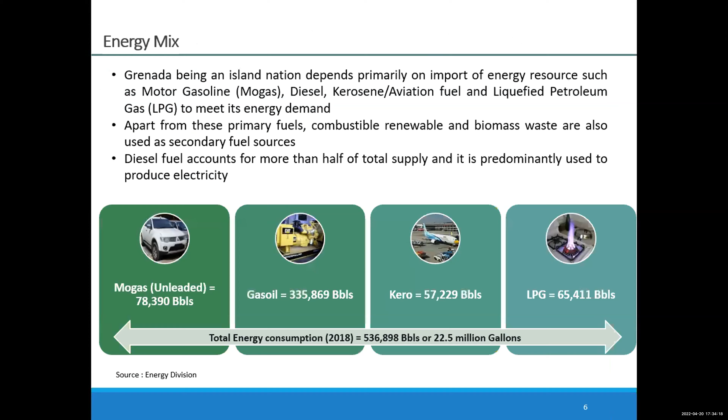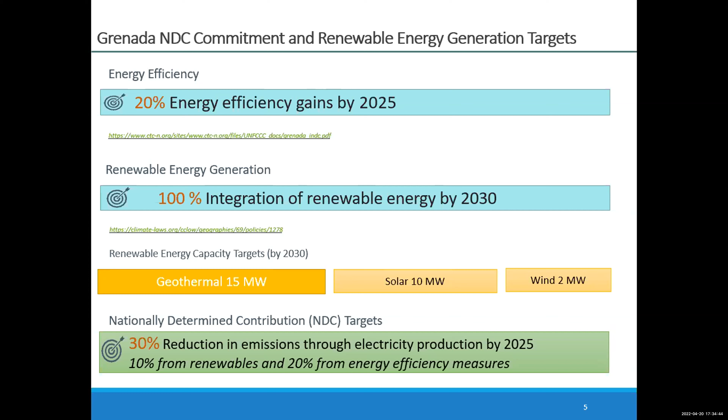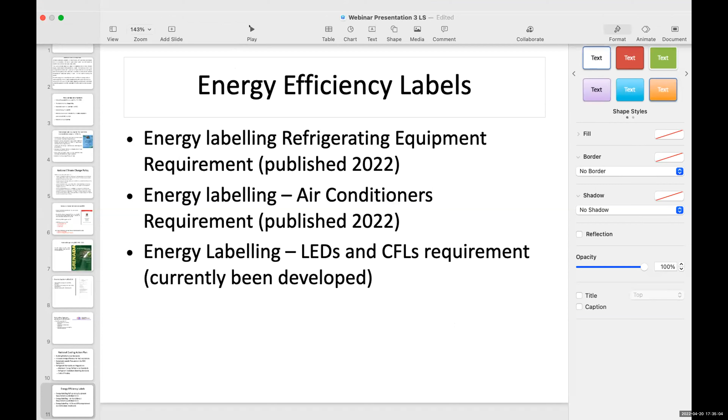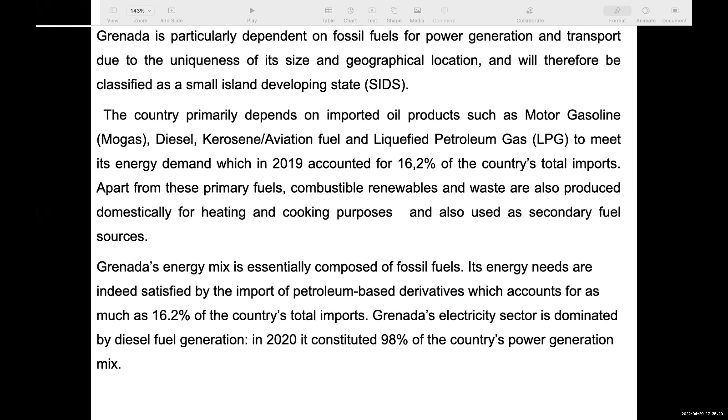Leslie? Good morning all, and thank you, Deacon. The presentation essentially is on the energy policies, the different policies and regulations that have been instituted to set the tone for the webinar. So if Dr. Rowe can stop sharing, I can share my screen so we can take it through. I take it everybody can see my screen now - yes, we can see. I would leave out all the preambular things here because I think Dr. Rowe would take care of that, but I want to speak on the protocol already established and recognize Dr. George, Mr. Joseph, Dr. Rowe and team, the other government officials, the officials from IRENA, the folks from the SIDS Lighthouse Initiative, the statutory organizations, the training institutions, and all the participants from Grenada, the region, and throughout the world.

With regards to some of the policies that government has instituted to promote the uptake of renewable energy and energy efficiency, quite a number of initiatives are currently being undertaken. First of all, perhaps the most overarching is the National Sustainable Development Plan 2020-2035, the National Climate Change Policy, the Nationally Determined Contributions, the National Energy Policy, the Electricity Supplies Act of 2016, the Public Utilities Regulatory Commission Act of 2016, and the National Cooling Action Plan. So what I would do now is go through some of them with brief annotations, starting with what the National Sustainable Development Plan speaks to.

This plan basically establishes feed-in tariffs and adjusts them accordingly to stimulate uptake and investment in renewable energy technologies. It also includes minimum energy performance standards for buildings, products, and appliances. There's a capacity development aspect that would improve the capacity of nationals with regards to renewable energy technologies and energy efficiency. As Dr. George mentioned, it speaks specifically to the introduction of electric and hybrid vehicles as we transition away from petroleum-based internal combustion engines that dominate the market. It also looks at other policies and support systems to make these technologies affordable for the energy impoverished, and includes public awareness for renewable energy and energy efficiency. All that is part of Outcome 8 of the National Sustainable Development Plan 2020 to 2035, and a lot of what we are going to be doing from the Energy Division would focus on Outcome 8.

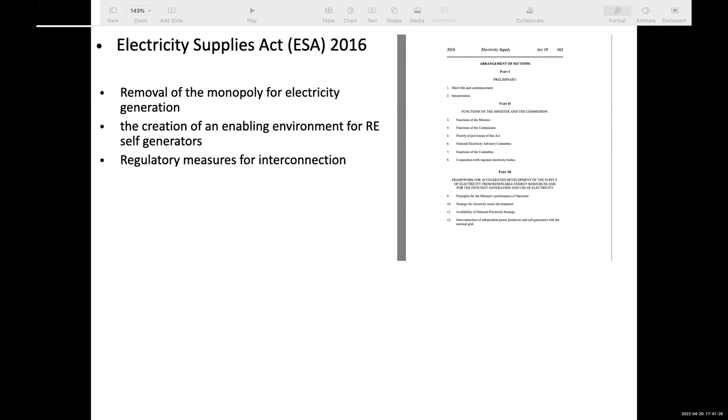The Electricity Supply Act was a major linchpin in the whole movement towards renewable energy. Essentially, the Electricity Supply Act removed the monopoly for electricity generation and created an enabling environment for renewable energy self-generators, both at the domestic level, the commercial level, and for independent power producers as well. It also takes into account regulatory measures for interconnection to the grid with the utility company. So that has been a major game changer with regards to renewable energy penetration.

And then we also have the Public Utilities Regulatory Commission Act of 2016. The PUC, which is the implementer of this act, is responsible for regulating utilities rates, and in this case electricity is the focus now for the PUC. As we've been told, later on they will address other utilities.

The PUC is also responsible for establishing the self-generator program, and that has been established. On the website, you can gain useful information as to how you can participate in the self-generator program, both as a domestic generator or a commercial generator. They are also responsible for defining the parameters for eligibility under the self-generator program. So I would invite you to visit the website, and you'll gain a lot more information in terms of how you can be part of the self-generator program.

And then we also have the National Cooling Action Plan. This plan basically addresses the cooling sector and energy efficiency in the cooling sector. From a survey that was conducted here, it was revealed that approximately 46% of the electricity generated by Grenada is used for cooling. So if we can achieve energy efficiency in the cooling sector, it means that we can significantly reduce our emissions related to cooling and draw closer to achieving the NDC targets described earlier.

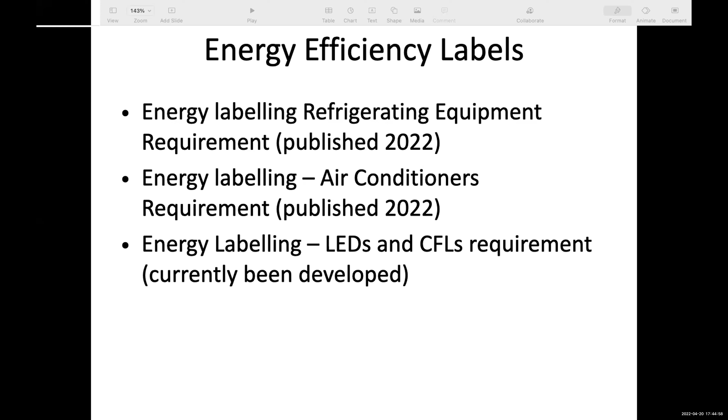We have a number of energy efficiency labels already established in conjunction with the Grenada Bureau of Standards. Already published are energy labeling standards for refrigerating equipment and for air conditioning equipment, both published in 2022. There are also energy labeling standards currently being worked on for LEDs and compact fluorescent bulbs.

One already established that was left off the slide is energy efficiency labeling standards for electrical appliances, such as blenders and fans. So there are quite a number of policies that seek to promote the uptake and proliferation of energy efficiency and renewable energy in Grenada. Government has also moved swiftly to provide incentives, concessions, and subsidies to promote the uptake of these technologies. With regards to electricity cost, government has instituted a zero rating on the VAT, as well as the removal of the environmental levy on electricity consumption for domestic consumers with usage up to 500 kilowatt hours, and a reduction of 20% on the non-fuel charge per kilowatt for all categories of consumers.

With regards to gasoline prices, there's a cap on the cost per gallon of gasoline and diesel whenever retail prices rise above $15. For example, with the recent change in gasoline price, had we used the original methodology for calculating prices, it would have exceeded $15, but the cap keeps it at $15. Another incentive in place is the subsidy provided for 20-pound LPG cylinders, capped at $40. Again, prices would have exceeded that, but subsidies have been provided.

Another very recent measure is that government has instituted a 100% concession of duties and taxes for all solar PV off-grid and grid-tied systems, including batteries and all other components such as wiring, racks, screws, bolts, and nuts—everything related to solar PV installation now attracts a 100% concession of duties and taxes. There's also a 100% concession on duties and taxes on electric vehicles, again to promote uptake. Already established several years ago is the exemption of VAT on all energy saving bulbs, including LEDs and compact fluorescents, under the VAT Amendment Act passed some years ago.

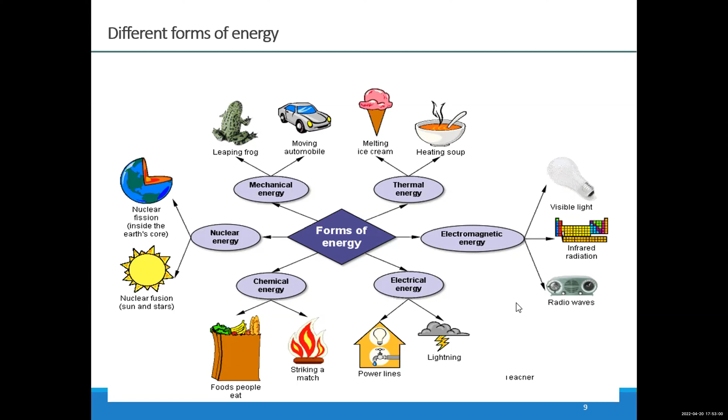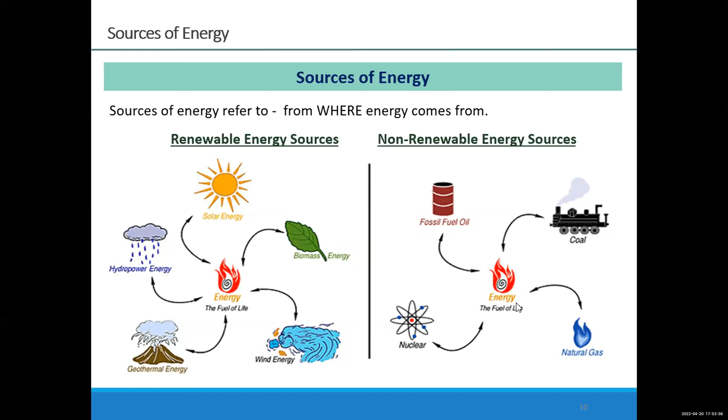So the energy, whatever the source of energy we have, we receive in two forms. One is renewable energy, and the other one is non-renewable energy source. Non-renewable energy source is a concentrated energy which is in fossil fuels, in coal or nuclear, or the fuels which are regularly available and we use. Even in Grenada, we use fuel oil for diesel, which is used for power generation. We have the other source, which is renewable, non-exhaustible renewable energy sources like solar, biomass, wind, geothermal, which is also a potential geothermal in Grenada, and hydropower energy from the rivers and other sources. So these are the different forms of energy, sources of energy where we can get.

But the main energy which we use for our regular use is electrical energy, which is a very focused one, which is mainly consumed in a normal, recent kind of lifestyle, what is expected, due to ease of conversion from the energy to any other form of energy. We get this electricity from both conventional and renewable energy sources. The energy which has been produced, electrical energy, will be converted in an easy way to other forms of energy for heating, lighting, and entertainment, or even for sound, whatever the form we want, it can be easily transferable from one form to another form. That is why electricity is a very superior and good, high quality energy, we can say.

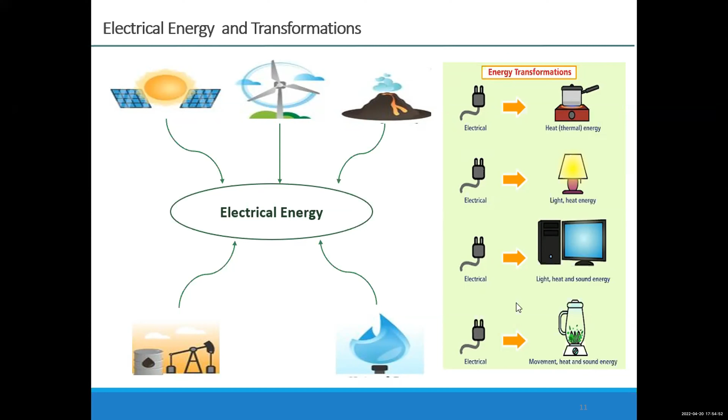So the electricity, when we are getting up to our user end, which will have different components, it also has inefficiency or wastage in the energy. It is a very easy analogy with beer, where if you want a full glass, there is some amount of foam which will be generated, which is nothing but waste. But it is necessary. So when electricity transfers from the generation point to the end user, a certain amount of loss will take place.

There is a reactive power which is there, which normally to minimize, you maintain what is called a good power factor, where active power and apparent power both should be close to unity. Then you will get a minimum amount of losses in the transmission systems or in the appliances. So electricity is not only the active power, but there is reactive and apparent power also, which are parameters one needs to know.

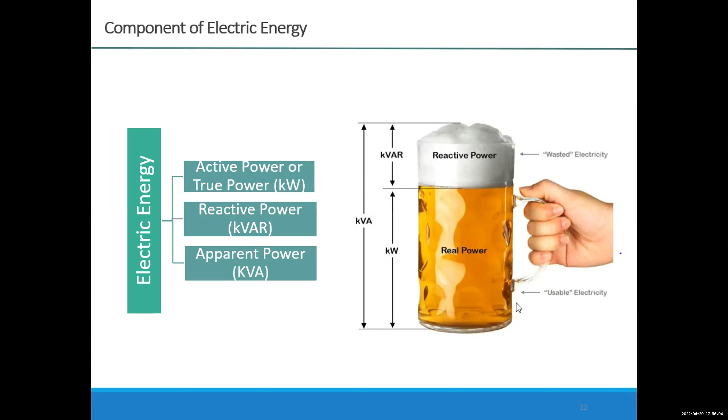So how do we decide how much energy an appliance will consume? The energy metering, which will be at the place in the domestic house or the institution or the facility or building, depends on the input power, which is the active power, being addressed for each individual appliance, individual equipment. That is in terms of kilowatt. 1000 watts is nothing but a kilowatt, which is the conversion rate normally we use.

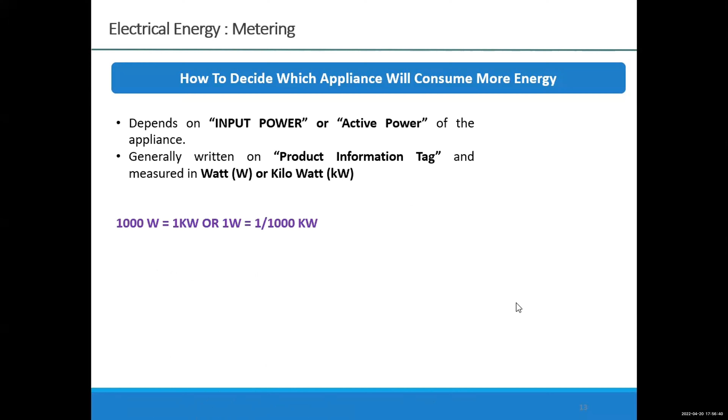So the energy meter installed at any premises will record kWh, that is per hour, every hour, how much units have been consumed, which will be recorded. So input power in kilowatts multiplied by time, that is the electrical energy. One unit of electrical energy is what the charges are paid for to the utility, like Grenlec, which has been paid.

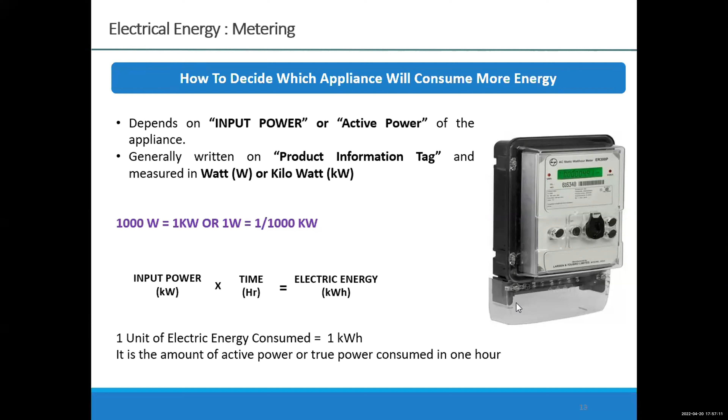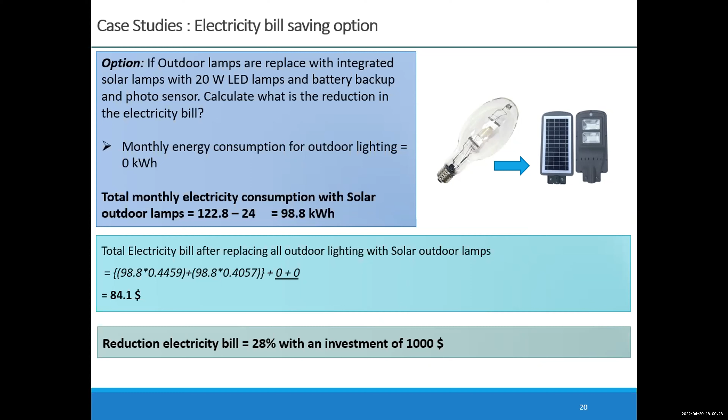Now we see the concept of energy efficiency and energy conservation. This is more for awareness of the basic concept. Energy conservation is nothing but a behavioral change, using our actions and activities to continuously ensure that less energy is consumed to do the same kind of work, whatever opportunities are there. Whereas energy efficiency is using less energy to do the same work through technology upgradation or proper utilization of appliances with respect to time of use, or other technological interventions. So this is the main difference between energy conservation and energy efficiency.

Some examples: turning off lights is energy conservation, not energy efficiency. Replacing conventional lamps with LEDs, which the government is promoting as a high efficiency program, is an energy efficiency appliance replacement program. Setting the thermostat of an air conditioner to a comfortable temperature of 24 degrees, instead of 18 or 20 degrees, is a behavioral change that reduces energy consumption - that is energy conservation. And replacing old non-inverter ACs with high efficiency inverter-based air conditioners is energy efficiency. So these are some examples.

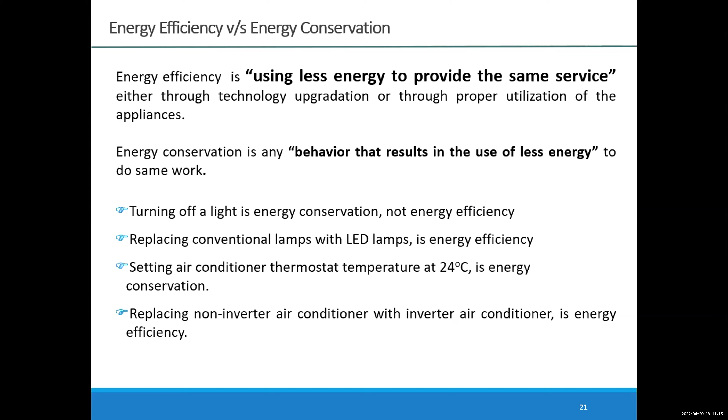Now, other examples like washing machines - front loading versus top loading is a technological change. People should know that front loading washing machines save more energy because they use less water, and therefore less energy to heat that water. Whereas drying clothes outdoors in the sun is an energy conservation opportunity, which is more of a behavioral change.

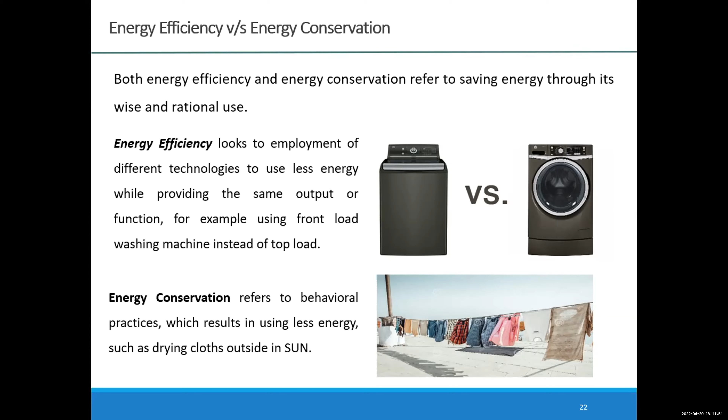For energy efficiency and conservation, other opportunities include use of high efficiency LED lamps, for which standards now exist in Grenada, and high efficiency ceiling fans using BLDC DC motors - direct current based appliances where energy savings are very high. Inverter-based air conditioners are also a type of DC integration, and induction stoves, which use a different cooking mode and different vessels instead of conventional electric stoves. In terms of consumption, all these technologies provide savings of over 30 to 40% compared to conventional appliances.

Whereas behavioral changes include examples like using staircases, bicycles, sizing of burners for cooking, and even transportation choices - these are items for energy conservation. Even using solar batteries and solar charging facilities for mobile charging is a behavioral change, where people adopt renewable energy, so this is also considered energy conservation.

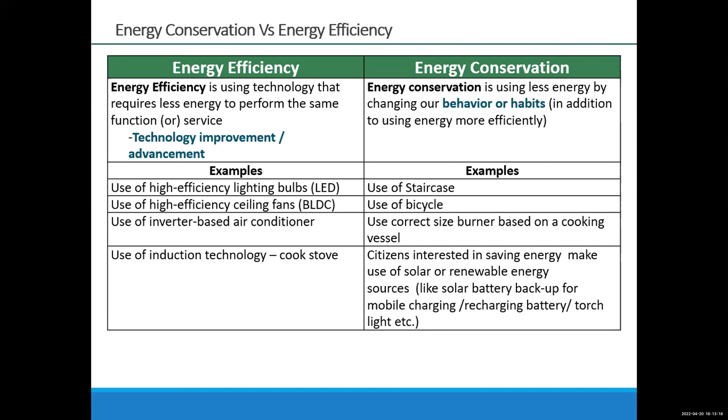Energy is particularly important for economic growth, as everyone has been told, even during the opening remarks. Energy efficiency is about increasing the efficiency of an appliance through technological change, with continuous development of products taking place. Energy conservation also includes energy efficiency, but includes simple actions like turning off a switch, as we saw in the example. Energy management involves various steps - you need to define, in an institution, the awareness, knowledge and intention of people, and provide them facility and training. If you do all these things together to bring down energy consumption, it is called energy management practices.

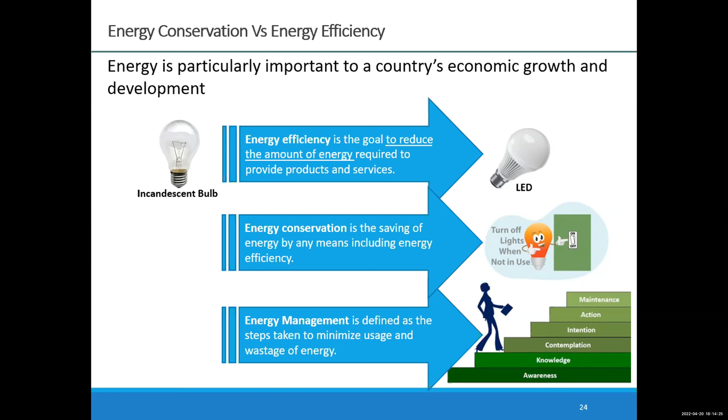The difference between energy intensive, energy efficiency, and energy conservation. If someone is taking the stairs, that's nothing but energy conservation, which we are already discussing about habits and practices.

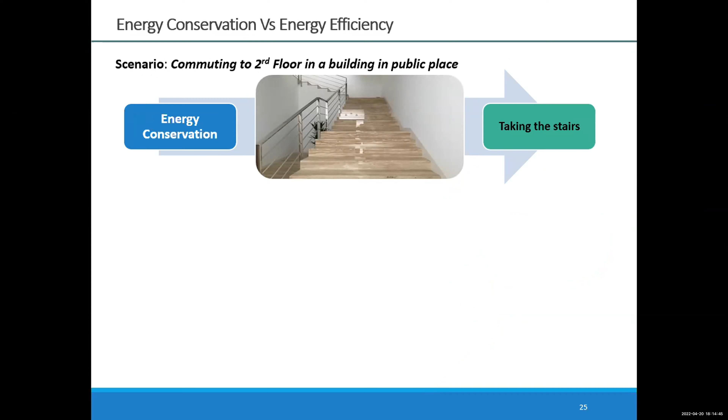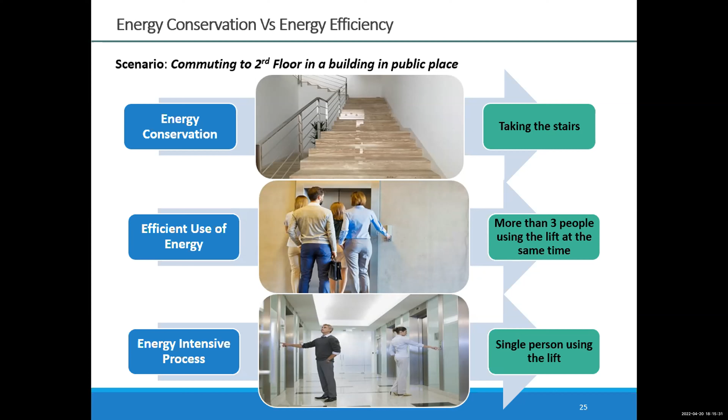Efficient use of energy: if you have a lift with a capacity of minimum 3 or 4 members, and you use it at full capacity, you're using the minimum amount of energy required, which is an efficient way of using it. But if a single person uses the lift, that's adopting an energy intensive process. In your daily activities, you can find different aspects of whether you've adopted an energy intensive process, an energy efficient process, or energy conservation through certain activities in your own way.

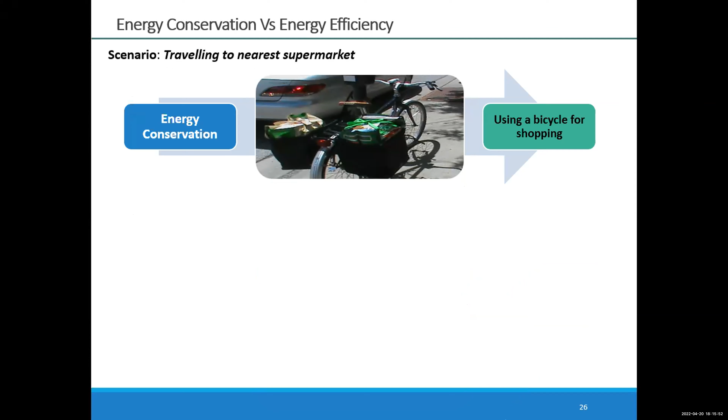Even transport, the energy consumption for the transport sector is very high, even in Grenada. If you adopt walking or using a bicycle, that may be the energy conservation mode if the destination is near. Using an efficient way means a small car or hatchback, not like a pickup where the mileage per gallon of fuel is less. So the adaptation is how you adopt your strategy and what kind of vehicles you buy.

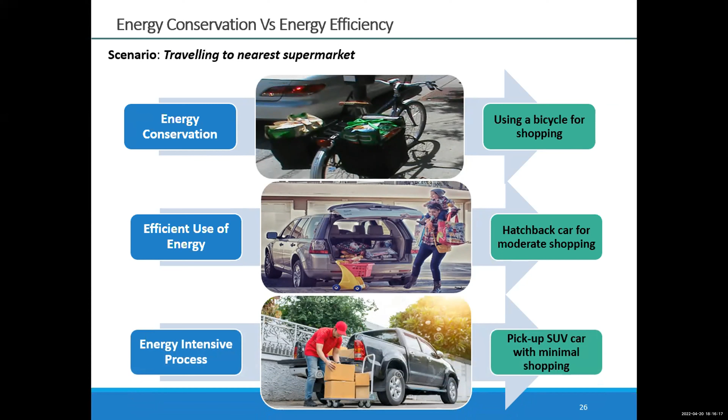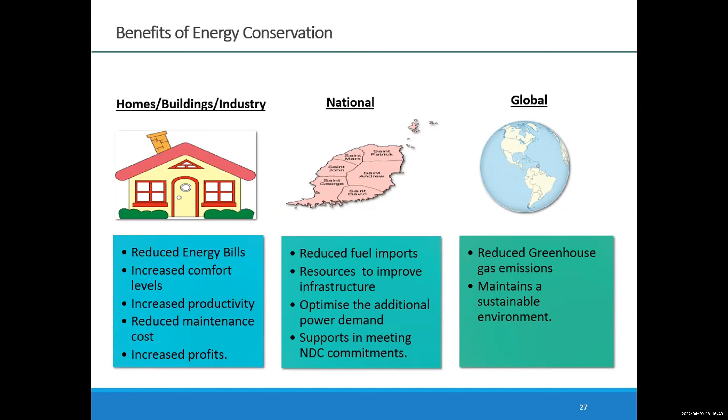Even now, the government is promoting electric vehicles with removal of taxation. You have different benefits from adaptation of energy conservation at the national level, individual level, and even global level, which is why the NDCs, the nationally determined contributions, have energy efficiency playing a key role.

If you see the energy cost, availability, and scarcity - in recent weeks, with the war between Russia and Ukraine, there is a global issue where various countries are facing fuel shortages. That's an issue if you're depending more on fossil fuels. The cost is also fluctuating continuously, reaching even $120 US dollars per barrel, and there's an environmental impact as well.

But economic growth is a continuous process for every country, so growth will be there. So one way of meeting the energy demand is energy efficiency - it's a must. It's a continuous process, not something done in 1, 2, or 3 years by 2025. People have to continuously adopt energy efficiency methods and practices. As on date, in Grenada, at least 5 megawatts of electrical power can be brought down through energy efficiency measures alone.

Dr. Rao, I was thinking as you presented the example with the elevator, to take it more to everyday use - for example, you can say you use less energy if you iron all your clothes at once instead of ironing individual clothes. Or perhaps if you're using a washing machine, you wash a big bulk of clothes instead of using it for small loads. I just wanted to relate that back to your example with the elevator.

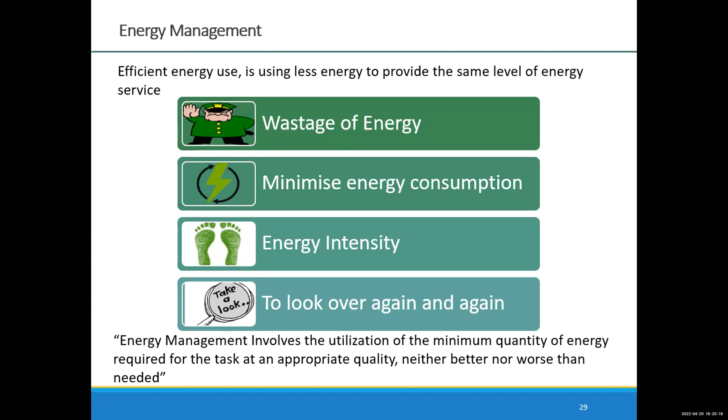The basic startup is, whatever activities are going on, try to first identify energy conservation measures where there's no investment needed, like switching off bulbs. Even last session we saw government buildings where lights are on 24 hours because there's only a single switch for the first floor, second floor and ground floor. So you need to identify ways to cut down energy with practices, whether you can integrate new switches so that employees, when leaving the office, can switch off the appliances.

We have seen many places where water coolers in offices during weekends, when people are not there, can be switched off from the plug itself so that power can be saved. So each facility needs to identify their own consumption, where it is happening and how. That is the first step.

Then you can go for the next step, energy efficiency, where new items can be integrated, new retrofits can be done, like motion sensors or automation or timers. Those kinds of energy efficiency retrofits can be integrated as a second step.

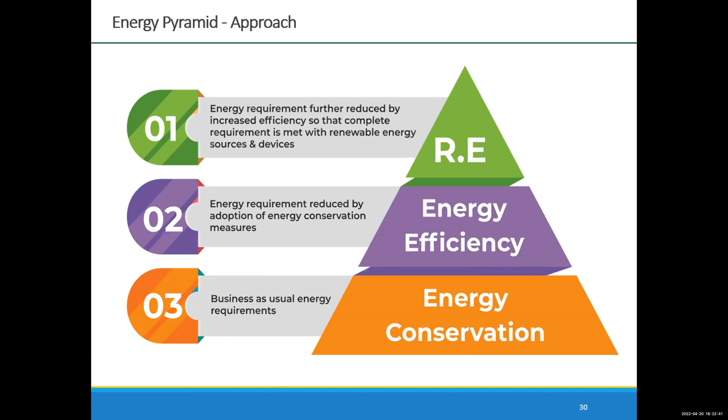By doing energy efficiency and energy conservation, one needs to bring down the energy consumption in kWh of the facility or appliance. Then we can look forward to the remaining energy, where renewable energy can be integrated. Only then will cost optimization happen. Without doing energy conservation or efficiency first, if you try to go directly for renewable energy, the cost economics will not work out, and it's not a sustainable approach. One can understand this from the energy pyramid.

So why has energy efficiency not been taking place? It's basically about who manages the energy in a particular facility. If it's only the responsibility of the electrical department or whoever looks after electricity, they don't know what the end user requirements are and how they operate.

So there are stakeholders - all people should have a participatory role. It's not only the people managing the electricity, but also the people using these appliances and equipment; they should also provide inputs. Then you have to draw up standard operating procedures, SOPs, for each appliance - how it should be operated. Then it should be informed to all employees and staff, and they start working accordingly.

But sometimes energy inefficiency is built into the system because vendors promote whatever appliances are available for them to sell. One needs to look at minimum performance standards, minimum energy efficiency performance, like for air conditioners and refrigerators in the market. Those standards should be checked before procurement, rather than leaving it to the vendor's market.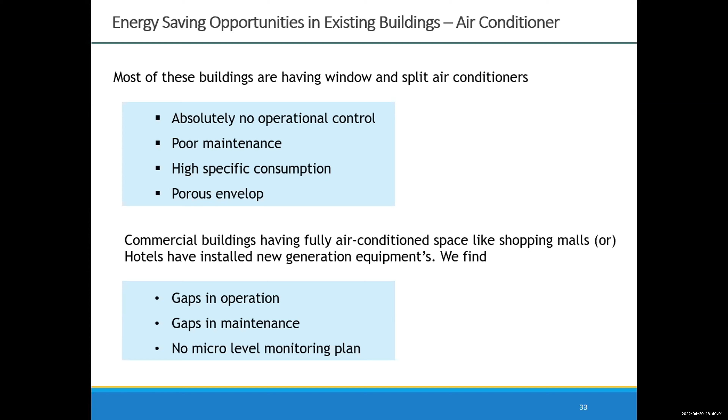Where if you have the outdoor unit without a shade, the outdoor unit itself will become very hot during the summer, the sunny temperature. And if that itself has become hot, then it will affect the cooling - it will pass on to the refrigerant. So that is the issue.

So there should not be open-ended outdoor units - it should be kept under a shade. Then there should not be any restriction - there should be free airflow to the outdoor unit. That is also an important aspect.

One needs to look at whether they are fixing units on the walls or rooftops - wherever they are fixing the outdoor unit, not only from the sun heating, but also if the weather has continuous rainfall and other things passing on the outdoor unit, there also the life of the unit will come down, rusting and other things will take place in the units.

People must have observed this. So it is good that if somebody is buying air conditioning units, they need to take care of the outdoor unit, because that is the only part that's outside - the indoor unit is kept inside. But by doing the shading and other things, 5 to 8% energy can be saved in some places. One needs to look into this particular angle.

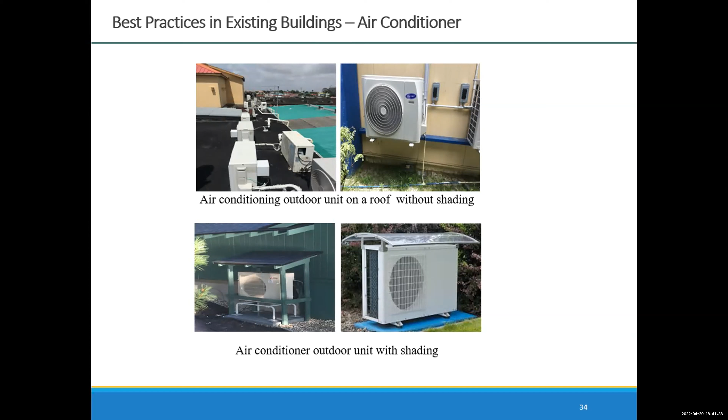One has to map any building or any facility to identify where the high energy intensity and low energy intensity areas are. Next.

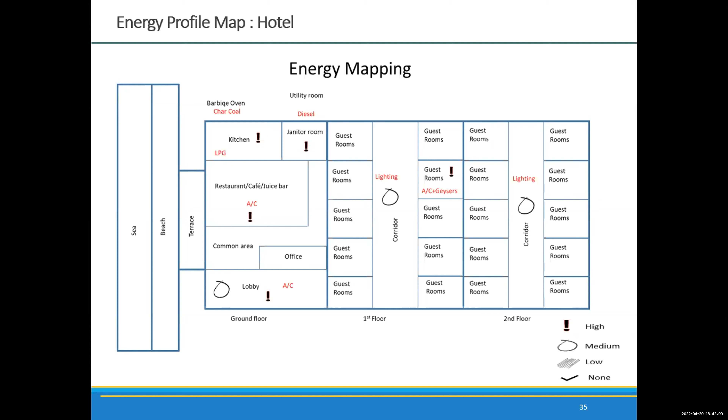Once after mapping the energy consumption, you have to identify what could be the probable reasons, and how you can monitor what kind of loss or wastage is taking place - like guest rooms and common areas with high energy consumption in ACs, kitchen where LPG and charcoal are the high energy consumption, utility room where diesel is the consumption, and guest rooms which apart from air conditioning also have water heaters and geysers.

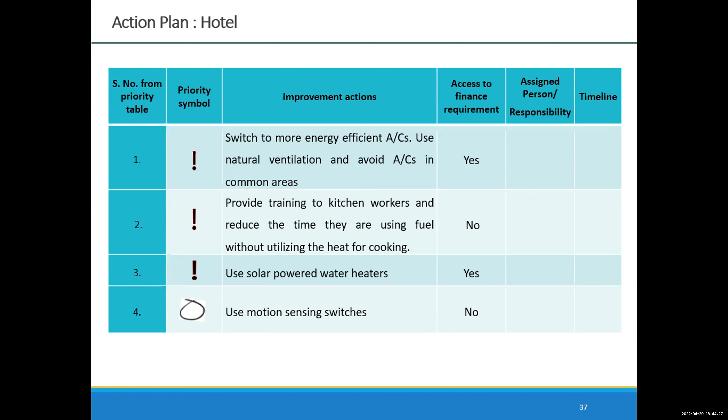After air conditioning, the next predominant energy consumption in public buildings, residential or outdoor areas is lighting. One needs to look from the design stage itself, whether for new buildings or retrofitting existing ones: efficient lighting systems, more daylight integration at all levels, so that at most you don't need lights on. There are a lot of techniques and retrofits available now that can be looked at.

Efficient lamps, LEDs mainly nowadays, are available in the market at a good price. Using luminaires to increase brightness is another area. Efficient controls need to be integrated too, occupancy sensors, daylight sensors, even timers for weekends and other situations to control. These opportunities also exist in lighting.

For task lighting, if there's a big room where only one or two people are using it but the entire floor is operated through one or two lighting switches, task lighting can be integrated. These are the means and ways one can look at in lighting. So air conditioning and lighting are the two prominent areas in public buildings and training institutions.

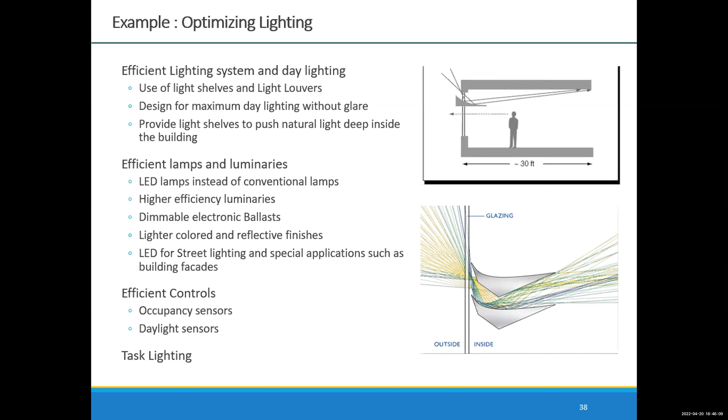Ultimately you can consider solar air conditioning for smaller capacities; for bigger capacities it's very difficult and solar becomes very expensive. So solar air conditioning should be looked at as the last option. That is how one needs to drive energy efficiency towards renewable energy.

I think one other important consideration is that even before we get to the base of the pyramid, before efficiency and conservation, is to first look at avoidance of having to use AC. That should be the first step, in the sense that you can design your buildings or rooms so that you can use natural ventilation and avoid having to use energy for cooling.

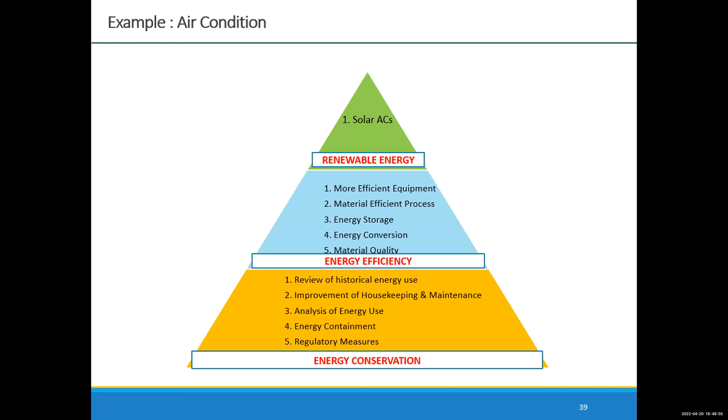Next slide. So for energy use, whenever we are using energy, one has to look into the aspect of where it is needed, when it is needed, how much is needed, and what quality of energy we are using for that particular application or use.

One has to put these questions to themselves before use, or list down your activities and try to mark how things are being done. Because once you put this question to yourself, you will come to the answer that some scope exists. That kind of confidence will be built by this exercise itself. Next.

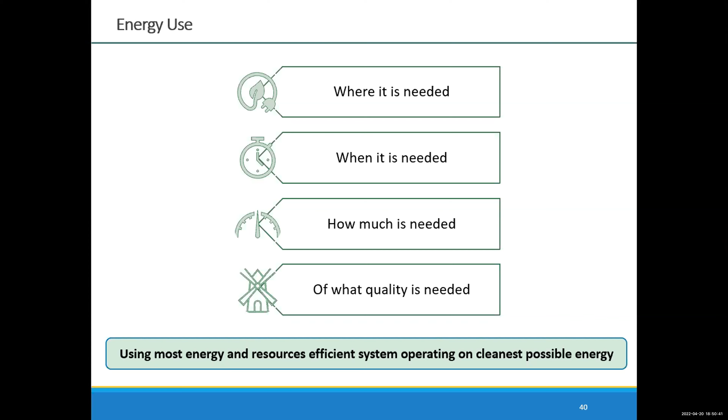The 5 T's for energy conservation is very important. One can look into any of their actions or appliances being used. You can look into the option of turning it off where possible, like UPS systems, or switching off from the main instead of remote switching, like a TV, you can plug it off from the main switches. You need to see where there is scope for turning off items. That is an important one.

Turning it down is about temperatures. When using heating appliances like microwaves and other things, one needs to look at the best, lowest temperature for the heating elements. And turning it up, like thermostats for air conditioning, the best higher temperature. The normal temperature set by manufacturers is around 18 degrees, but normally we apply 21, 22. If we can manage with comfort clothing and other adjustments to set it at 24, that is a reduction in energy consumption.

Turn around means you need to look into the appliances, what best is available within your own set of uses for the same purposes. And turn it out means old and inefficient equipment, mainly motors and other things that have burned out 2 or 3 times and you still want to use them, causing high energy consumption. You can look into the best way and when it should be turned out, phase off that particular appliance or equipment and go for a new one. This is the 5T concept for energy conservation, which is very important. Next.

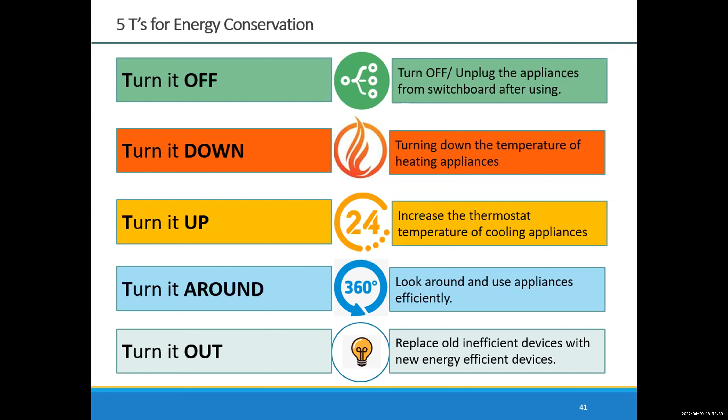As we are seeing, there are high efficiency products available in markets, and minimum performance has been set by government policy, and standards are being brought into place for air conditioners, refrigerators, and LEDs. CARICOM itself is developing standards, and Grenada has already adopted high efficiency equipment standards. So for procurement, mainly as we are discussing public procurement as a startup, one can look for the minimum performance, and even air conditioners with high efficiency have already been demonstrated and are being sold in the local market.

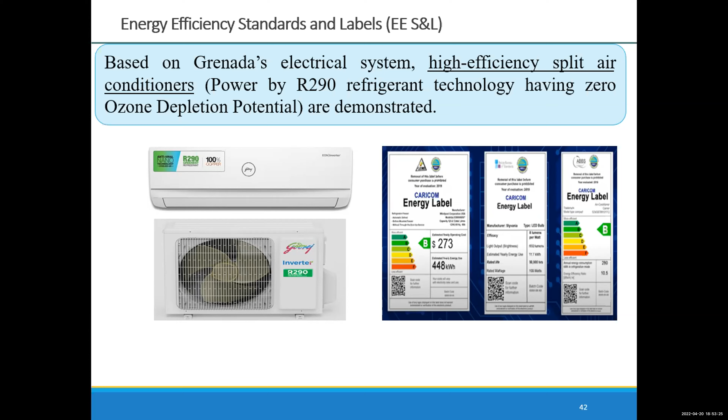EV is definitely going to pick up in the next 2 to 3 years across the Caribbean or entire global scale. Even in India, we see every day a new EV company starting up, coming up with 2-wheelers, 4-wheelers, and even transport vehicles.

In the Caribbean market, we found the import cost of a good, comfortable vehicle is around $40,000 US. If you work out the payback period comparing gasoline and EV with grid power cost, there is a good amount of cost savings in running cost. Depending on the type of use and number of kilometers, the payback period works out to almost 4 years at today's cost. Public or government institutions with 4 or 5 vehicles can have their own charging station and start using electrical vehicles.

Some model can be defined. Since it's an island where there is a certain distance only, the kilometers of use of vehicles can be monitored for a certain period, and definitely EVs can be integrated into public and government institutions. That is a strong point, I feel.

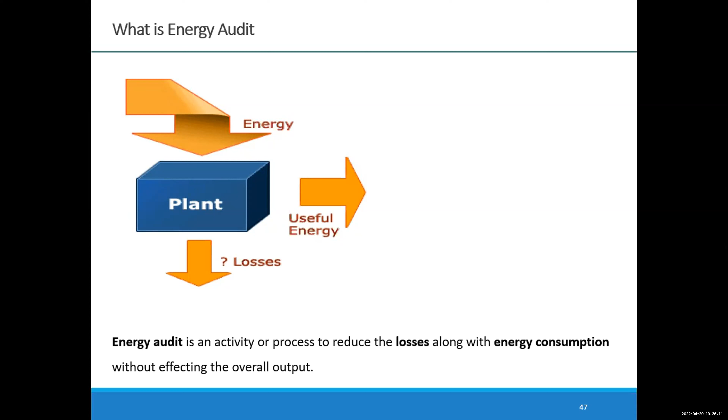That is energy audit. So energy audit is defined as the verification, monitoring, and analysis of energy use. It also includes submission of a technical report which includes all the recommendations to reduce energy consumption, the cost benefit analysis, the payback period, and the financial benefit of implementing any energy saving measures.

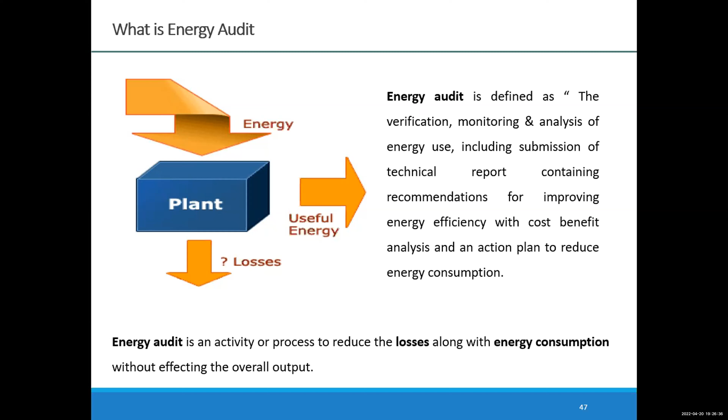Now why do we need energy audit? If we talk about any industry or facility, the 3 top operating expenses are energy, labor, and material. Labor and material we can't compromise on, and energy also we can't compromise on, but we can reduce energy consumption by changing our behavior or changing the technology. So the only way to reduce the energy cost or overall operating cost of any facility is by reducing energy consumption without affecting the final output.

This can be done by doing in-depth analysis of the energy consumption pattern and finding the potential for energy saving that exists within the facility. For example, one participant from a college or university mentioned that during lunchtime, colleagues leave their room and go for lunch, and lights and ACs remain switched on. That is a loss. So we need to identify the different areas where loss is happening and how to reduce that particular loss, and for that we require energy audit.

Hence, energy audit helps to understand how energy, whether electrical or thermal, is used, and to identify where waste occurs and where there is scope for improvement. It also gives positive orientation to energy cost reduction. Ultimately, the aim of energy audit is to reduce energy cost and translate the proposed energy saving measures into reality. It should not be that we propose something which is not practical or not implementable.

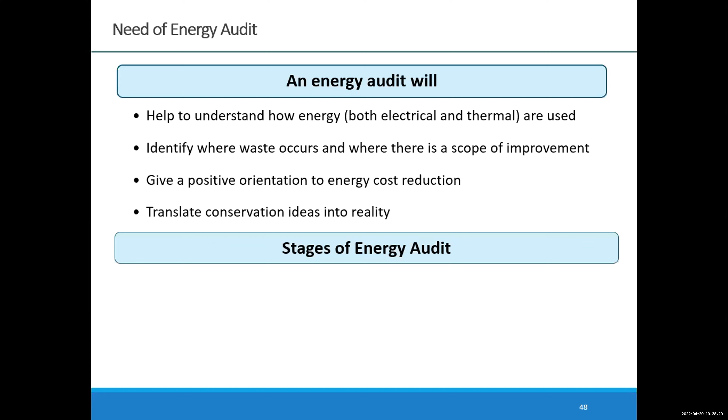What are the different stages of energy audit? The first stage is to gather preliminary data, for example the historical electricity bill. Why is the electricity bill required? Because we need to know how much electricity is consumed every month within the facility, home, or institute. Then based on that, we conduct a field visit, or plan a field visit, to find the scope or different areas where energy can be saved, and the different energy conservation measures that can be implemented, which are practicable.

And finally, we analyze and summarize all the energy conservation measures, discuss with the management, and find out which ones can be applied within that facility and which cannot be implemented. Finally, we do the follow-ups, to see how much actual energy saving can be achieved by implementing any energy saving measures.

All these things are also done to train the staff, so that once the audit phase is completed, the staff can themselves take the initiative and do the audit of their facilities, or audit after 1 year or 2 years, or whenever required. So each of these steps we will see in detail in a later part of the slides.

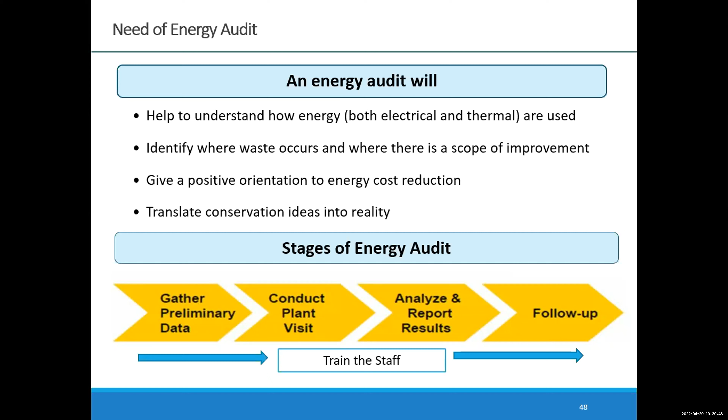Now the question arises, what are the different types of energy audit? The type of energy audit depends on the function, size, and type of the industries. For example, a small hotel or small institute might not require a detailed or in-depth audit; only a walkthrough audit is sufficient. So based on the potential and magnitude of the energy saving and cost reduction desired by the management, energy audit can be characterized into 3 parts.

Level 1 is walkthrough energy audit. Level 2 is detailed energy audit, and level 3 is investment grade audit.

Walkthrough audit is a simple energy audit, a one day or half day visit to the plant, which provides a quick overview of energy use patterns based on observation and historical data collected. Before going for the field visit, the energy auditor will collect the historical energy consumption trend, like the last 1 or 2 years of electricity bills, to see how the energy consumption pattern increases or decreases. For example, one of my friends said that after installing solar panels, the number of ACs increased from 4 to 20, and this is reflected in the electricity bill. All these things come to know by seeing the monthly electricity consumption, the kWh units consumed within that facility.

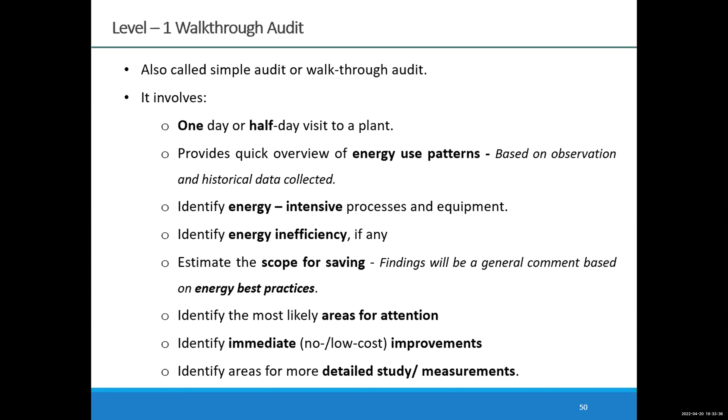In a walkthrough audit, the auditor also identifies areas that require more detailed study and suggests to the management that a detailed energy audit be conducted. For example, in hotels or resorts, lighting load or air conditioning load is usually the major consumer, so if management wants a detailed energy audit, these areas can be more focused upon. This brings us to level 2, the detailed energy audit.

In a detailed energy audit, the auditor evaluates all the systems and equipment that consume energy, and the audit comprises a detailed study of energy saving costs.

The detailed energy audit can be carried out in 3 phases: the first is the pre-audit phase, the second is the audit phase, and the third is the post-audit phase. As I mentioned, in a walkthrough audit, energy saving measures are generally based on best practices and mostly fall under no-cost or low-cost categories. But the detailed energy audit offers the most accurate estimate of energy savings and costs, and also tells the financial benefit you will get after implementing those particular energy saving measures.

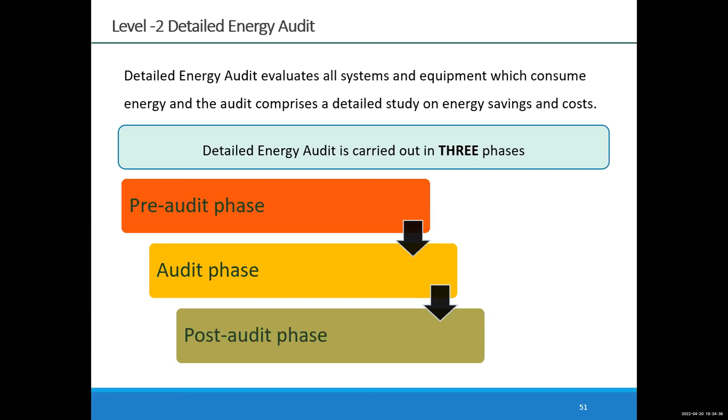In the pre-audit phase, the auditor will discuss with the site manager about the energy audit. They will try to understand the exact requirement from the management, what they want from the audit, any particular area they want to focus on, or if they want a full detailed audit. Then they will discuss with the facility management team and explain the different steps that will be taken during the audit phase.

Then they will collect the historical data. They will ask for like 1 to 2 years of electricity consumption bills. They will ask if any other source of energy is being used, for example diesel consumption, and how much diesel consumption there was in the last year within the facility. Based on that data collected, they will analyze and see what is the baseline for that particular facility, and how much average electricity consumption there is every month.

Along with that, they will also ask about the instrument list - what kind of instruments are installed within the facility. For example, for a hotel or resort, how many air conditioning units are installed, what is the rated power or wattage of those units, what kind of lights are used. For an institutional area with labs, how many computer systems and what different kinds of equipment are there. Then they will decide what kind of instruments need to be carried, and the exact or suitable time to do the field visit.

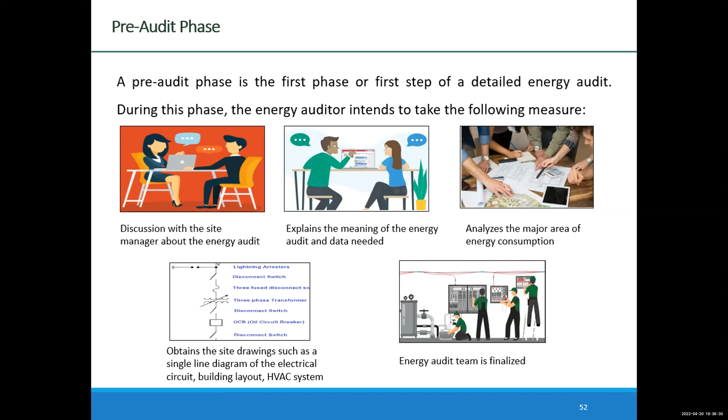The next phase is the audit phase. The auditor or team of auditors will go to the facility and do the evaluation of each and every equipment or area. They will try to find the efficiency of the equipment installed within that facility.

They will find which areas have more losses. For example, if you go for any water utility system, pumps will be there - water delivery pumps. So the energy auditor will go and evaluate the efficiency of the pumps. And for example, in a resort, AHUs - air handling units - will be there. What is the efficiency of that air handling unit? What is the efficiency of the compressor unit? All these things the energy auditor will do during the audit phase, during the site visit.

So during the audit phase, during the site visit, the energy auditor will calculate the efficiency of the equipment. They will prepare the process flow diagram and do energy balance. For example, suppose X unit of energy is consumed within the facility - out of that X unit, which area consumed the maximum energy? They will try to find out the different areas and their energy guzzlers within the facility.

Then they will identify the energy conservation opportunities that exist within the facility. Once identified, they will determine how much actual cost saving will be there by implementing those energy conservation opportunities, and what the payback is - whether the payback is immediate, less than 1 year, or requires more investment with payback within the next 3 to 4 years, or more than that.

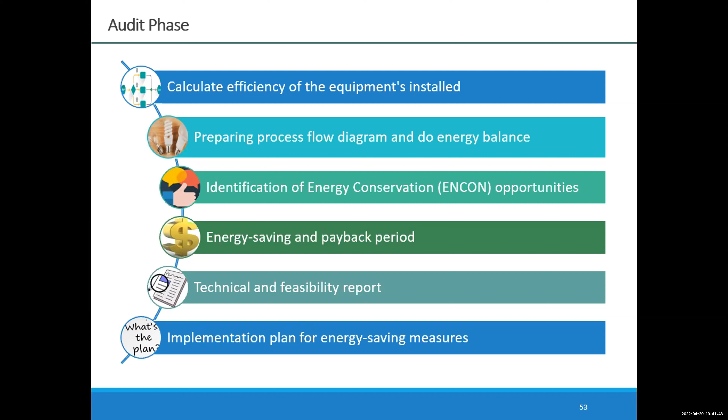Next slide. So the post-audit phase mainly focuses on implementation of the energy conservation measures and monitoring how much actual saving is achieved. For example, if the efficiency of a pump is very low, and we replace it with a high efficiency pump, then how much actual energy saving is achieved. All this comes under the post-audit phase, which includes implementation and monitoring.

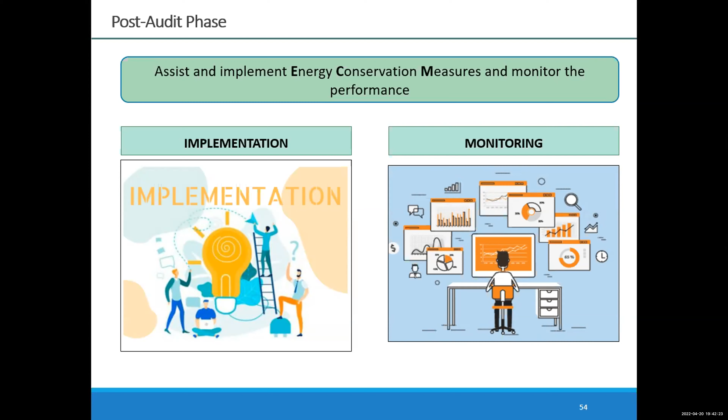Then the third one is investment grade audit. All energy saving conservation measures are generally categorized into 3 parts. First is low cost or no cost measures. Second is where the payback comes within less than 1 year. Third is where a huge upfront investment is required, for example installing solar panels, which requires a huge upfront cost. For all areas where huge upfront cost is required, management will ask to go for investment grade audit.

It includes all the steps of level 1, the walkthrough audit, and level 2, the detailed energy audit. But along with that, it also provides in-depth financial analysis such as net present value and IRR. For example, with solar panels, what is the IRR after 20 years, or what is the NPV after 20 years? So investment grade audit provides a guaranteed saving verification plan, because management needs to put in a huge upfront cost, so they will ask for detailed financial analysis. Only in that case will the auditor go and do an investment grade audit.

Now, what are the different energy audit instruments required? There's a famous saying: if you can't measure, you can't save. So to save energy, it's first required to measure how much energy we are consuming and how much losses are happening. To measure this, we require different instruments, because generally most facilities don't have installed instruments to measure the parameters. So an auditor will carry their own set of instruments.

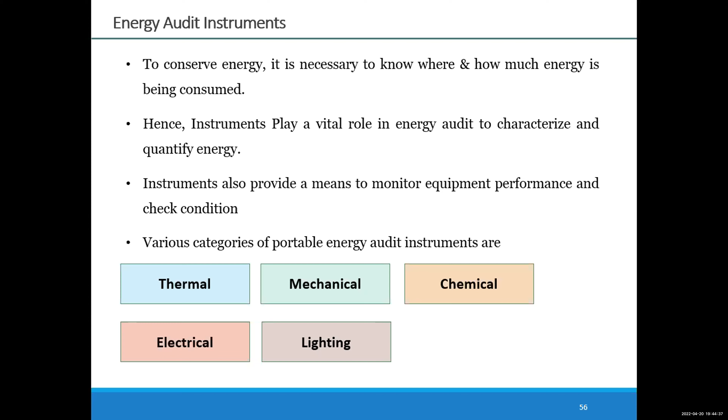Generally, the instruments are categorized into 5 categories: thermal, mechanical, chemical, electrical, and lighting. Electrical instruments are used to measure different electrical parameters, like an energy meter, which tells how much energy is being consumed by a fan or any particular appliance.

In the same way, we will also carry our own set of electrical instruments. It will tell what is the voltage coming into the facility, what is the current, whether there are any harmonic distortions, how much power is being consumed, what is the power factor and frequency, and if there is any unbalance. So to measure all the electrical parameters, we carry our own set of instruments, like a load analyzer or power analyzer.

A lot of these instruments will also tell you the time of day you have the highest consumption. These instruments can be used as instantaneous instruments, telling instantaneous power parameters. And if we want logging, to see how the energy consumption pattern changes over 24 hours, these instruments have the facility to do recording also, and will tell all the electrical parameters we require, for example voltage, current, harmonic, and power.

Electrical energy is categorized into 3 parts: active power, reactive power, and apparent power. The instrument tells how much of all 3 powers is being utilized, and what is the power factor, because if power factor is very low, it means reactive power consumption is more, and apparent power will also increase. So if power factor is low, we suggest installing a capacitor bank.

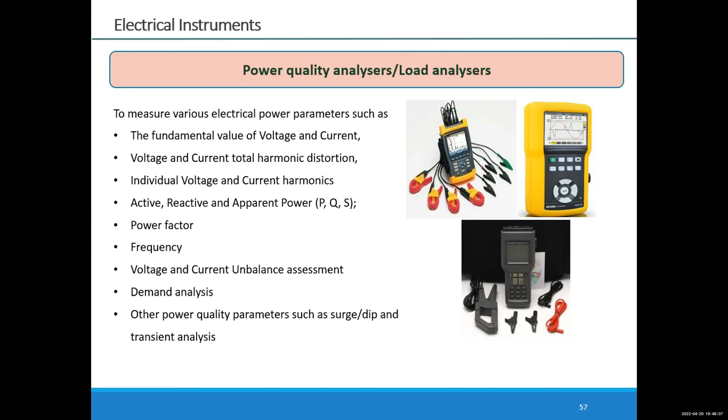Sure. So the next instrument is the tachometer. It is used to measure the speed of any rotating equipment like electric motors, pumps, blowers. This can be either contact type or non-contact type.

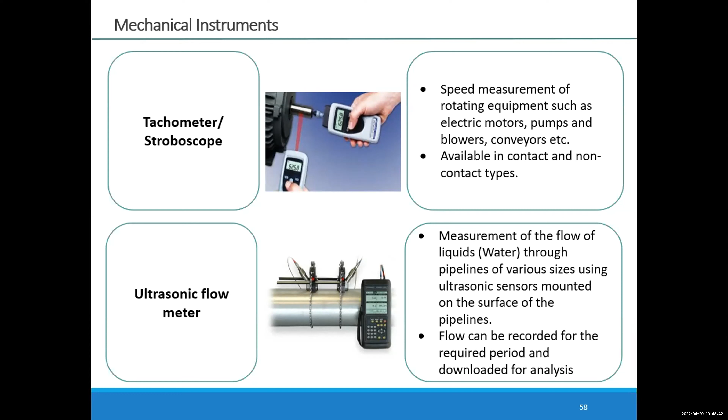Then we have the ultrasonic flow meter, used to measure the water flow rate. For example, if you want to measure the efficiency of a pump, it's important to understand the flow rate, the delivery from that pump. So to measure water flow rate, we use an ultrasonic flow meter, and to measure air flow rate, we use an anemometer.

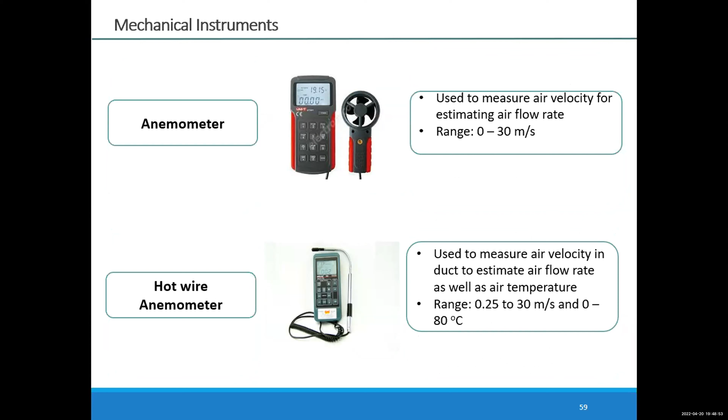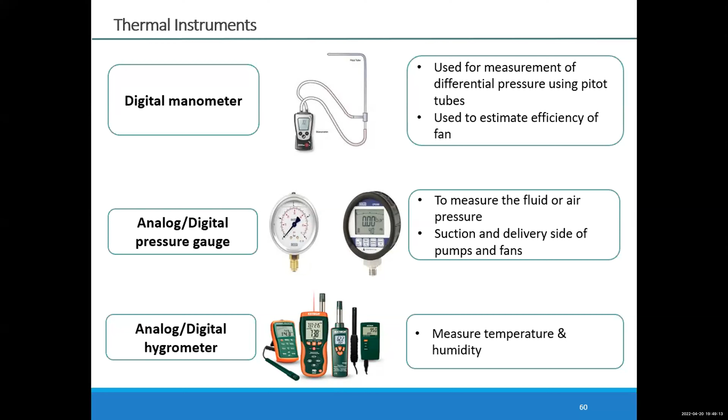Then to measure pressure, for example on the suction and delivery side, we use a pressure gauge and a manometer. To measure temperature and humidity, we have a hygrometer, and to measure surface temperature, we use an infrared thermometer. And to capture variations in temperature, we use a thermographic camera.

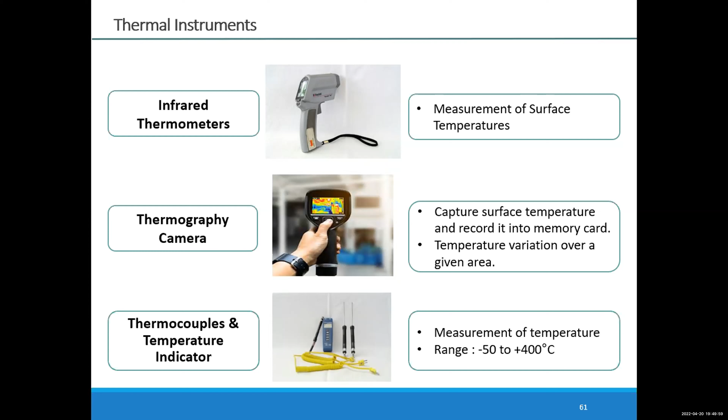It gives an image showing where hot spots are, where some air leakages are. To identify air leakages, we use a thermographic camera. The infrared thermometer and thermographic camera are both non-contact type. To measure the temperature of water, we use a thermocouple, which is a contact type temperature measurement device, while the infrared thermometer and thermographic camera are non-contact type.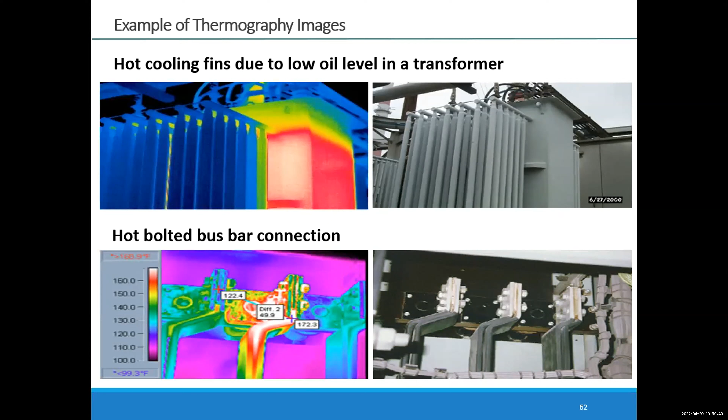Similarly, you can see more thermography images. The red area shows high temperature, meaning something wrong is happening within that particular area. So to know the temperature difference between surface areas, we use thermography images.

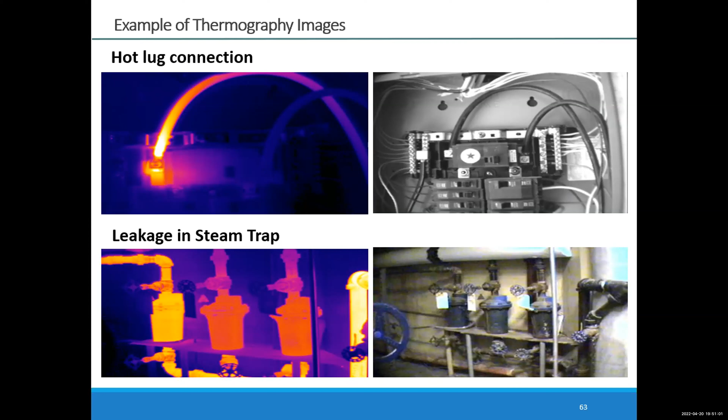Then we have the electricity recorder, a humidity data logger, and the lux meter. This is one of the most important instruments, particularly for hotels or other residential sectors, because for example while working, I require a minimum of 300 lux, and if the lux is more or less, it creates discomfort for me. So to measure the exact illumination level present within the room or working area, we require a lux meter. This meter is placed on the table or working area, and it tells what illumination is present within that particular area.

If it is within the limit, then it's okay, but if it is high or low, then we will suggest changes. If it is high, we suggest switching off a few lights, and if it is low, we suggest adding more light. So to measure the illumination level, we use a lux meter.

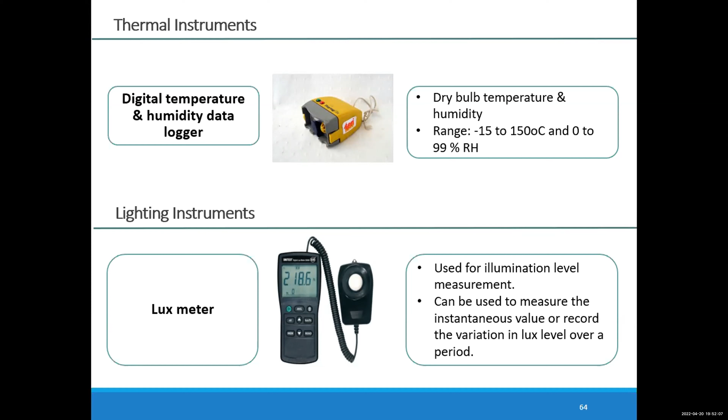Then these are like few chemical instruments to measure conductivity and pH for water quality analysis. We have conductivity and pH meters.

Then flue gases, suppose a boiler is there. In flue gases, what are the different parameters, like oxygen level, how much is there, carbon dioxide, how much is there. For that we have a flue gas analyzer. It will tell all the parameters like oxygen, carbon dioxide, carbon monoxide, nitrogen dioxide, and even the temperature of the flue gas.

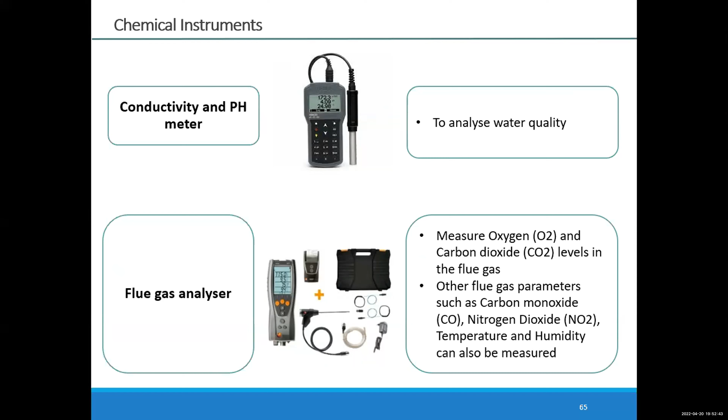Then these are other accessories like a notepad or tablet to write the different measurements, a calculator to do the calculation part, and a measuring tape is also required sometimes to take the diameter or length of the duct.

So these are a few instruments which we generally carry during a detailed energy audit or investment grade energy audit. For a walkthrough audit, no instruments are required, or minimum instruments, I can say, we carry.

So again, I come to the stages of the energy audit. The first stage is to gather the preliminary data. So what all data is required? First is the monthly energy consumption detail, which means monthly electricity bill or monthly diesel or any other fuel consumption bill or quantity. Then a list of the equipment or appliances installed within the facility, and other relevant information like total built up area, or if it is a production or manufacturing unit, what is the annual production rate.

This preliminary data is basically required to make a baseline. If energy consumption is more than that baseline, management can immediately take action to identify why the energy consumption increased. And if it is less than the baseline, then the baseline value can be shifted to that lower level.

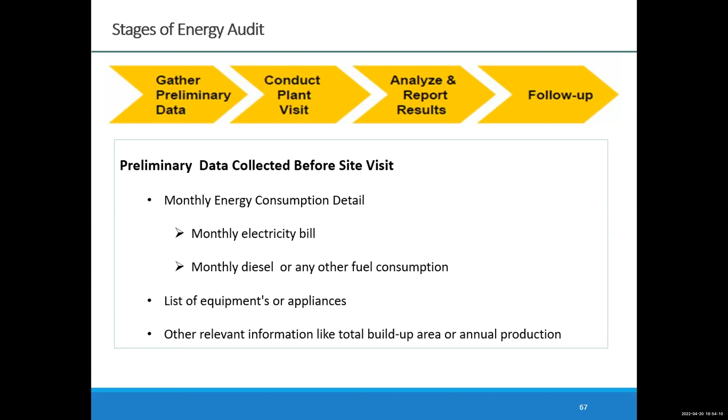Then the second stage is the field visit. So during the field visit, what are the different steps we will take? We will identify the energy intensive instruments or appliances. How will we do this? By calculating the energy consumption by instrument or appliance.

To know how much energy a particular instrument is consuming, we require an energy meter, like the image I showed you, the power analyzer. With the help of the power analyzer, we will connect it and see the energy consumption of that particular instrument. Like this, we will go to all the areas and determine the energy consumption in different areas. Based on that energy consumption pattern, we will identify energy saving opportunities.

That is step 2. Then step 3 is to calculate annual energy savings in terms of cost. Step 4 is annual cost saving. Step 5 is to calculate the investment required. And finally, step 6 is the payback period - how much payback, and how many months or years we will get the payback.

So these are the six steps which any auditor will generally follow during the field visit or site visit. In today's session, I'm going to focus only on step 1. The remaining steps 2, 3, 4, 5, 6 we are going to see in tomorrow's session.

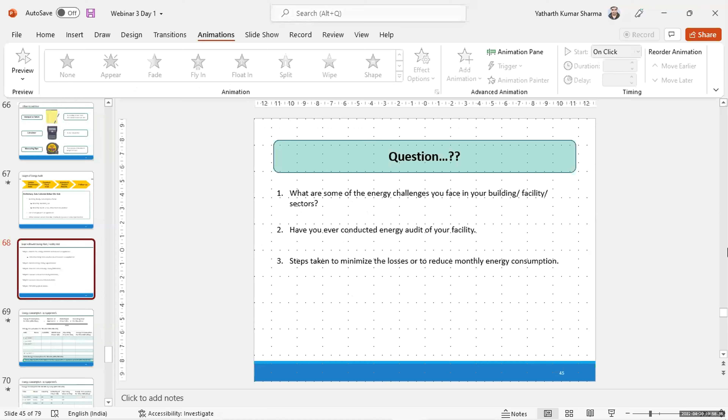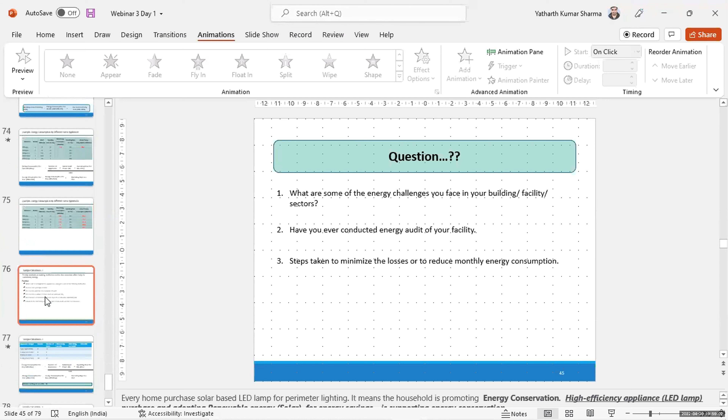Mr. Sharma, if you could just post the question slide, the next slide. What is this slide? What is the assignment? I think we were about to go into a calculation, so the slide, if you could, which should have been the next slide from where you were. If you could post the parameters for the calculation, and we allow the participants to attempt the calculations overnight.

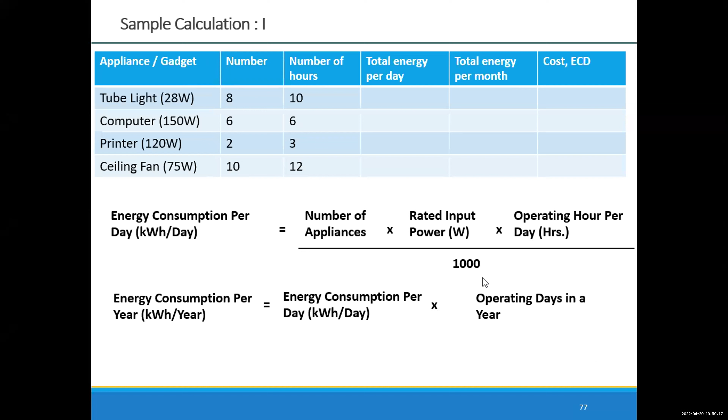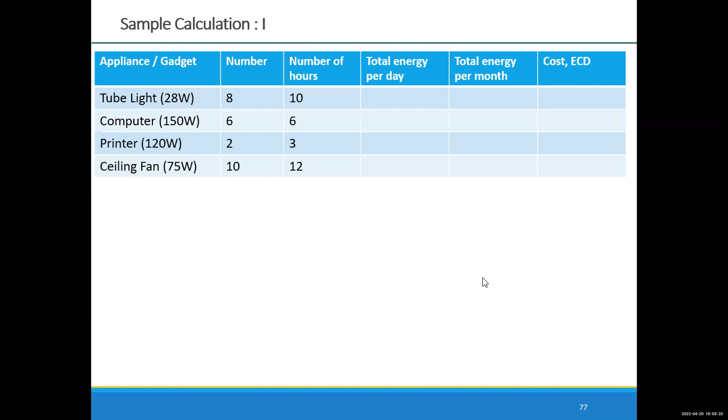Okay, that's it, this one? I don't know, can you go to the slide before this one? Or was this slide before this? No, we didn't. For this, the sample calculations we can give to participants. No, before this, yes. No, up. Okay, so you're here.

Yes, so the very next slide is energy consumption by equipment. What's the next slide after this? Okay, no, you're going too fast.

So my suggestion, Ellsworth, we would have looked at a preliminary calculation in one of the slides above where we worked out the energy consumption. Yatat, if you go up, please. So from here to the last slide, there are a couple of calculations.

My suggestion is that I will get the email addresses once this meeting is over, and participants will have an opportunity to review the slides and content, and work on this overnight or in their spare time before tomorrow's session. Yatat, what you can do is probably just summarize what these calculations and exercises are asking for, and then we can close the session. I'll be sure to share the presentations if that's okay with you, Ellsworth and Leslie. Yeah, that's okay, sure. That's agreed by us.

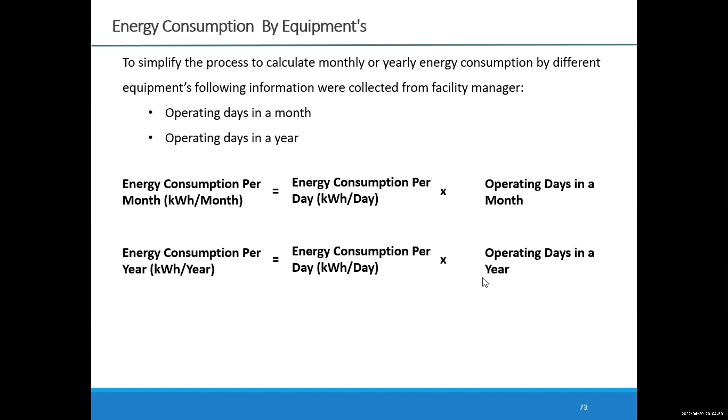Before that, calculating month-wise or day-wise is a lengthy process. To simplify, what an auditor will generally do is ask the management or homeowner for the operating days of that particular instrument in a month and in a year. Using a simple formula, to calculate energy consumption per month we multiply energy consumption per day with operating days in a month. And to calculate energy consumption per year, we multiply energy consumption per day into operating days in a year. These two formulas simplify the process. It's based on your choice which formula you want to follow - the lengthy process will give a more accurate answer, but this simplified one, though less accurate, can give you a good assumption.

I see there's a question - one second. John Akulo, I see there's a question from you, your hand is up. Sorry, I just forgot to lower it down. Okay, thank you, all right, sorry.

Okay, continue. So when we multiply energy consumption per month with per unit electricity cost, it will give you the monthly cost of utilizing the electricity. Our actual monthly electricity bill might be different because it also includes non-fuel charges and other taxes, but this will give you on average what the monthly energy consumption cost is.

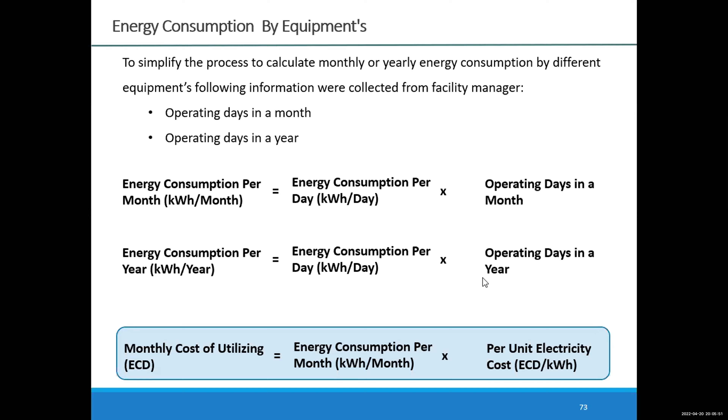So now your assignment is to calculate the daily energy consumption. The formula is simple: number of appliances multiplied by rated input power multiplied by operating hours per day - this gives daily energy consumption. When you multiply daily energy consumption with operating days in a year, it gives annual energy consumption. Or multiply by operating days in a month to get monthly energy consumption.

Tomorrow the homework will be to calculate the annual consumption of the LED lamp, fan, refrigerator, water heater, and water pump. So we could stop here and use this formula to calculate the annual energy consumption per year based on the operating hours. Would you agree that is a good way to stop, and a good exercise for the participants, so that when we return tomorrow we'll have the answers for these?